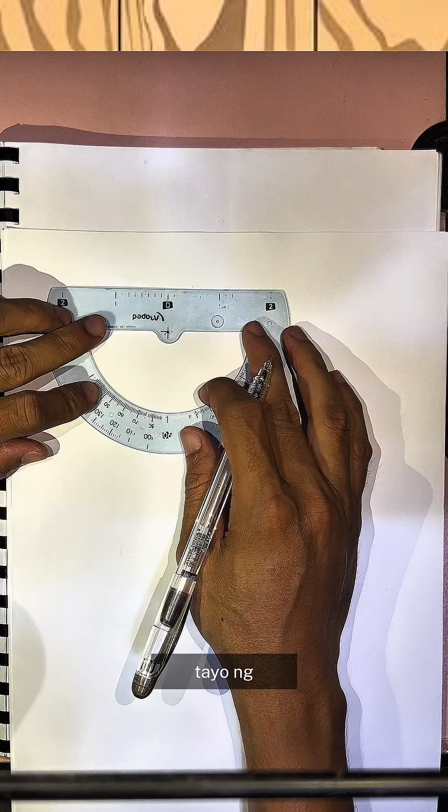So ngayon, magsosolve tayo ng past CE board exam problem sa hydraulics na sinend sa atin ng isa nating follower, isa nating brother, particularly on hydrostatic forces on plane surfaces.

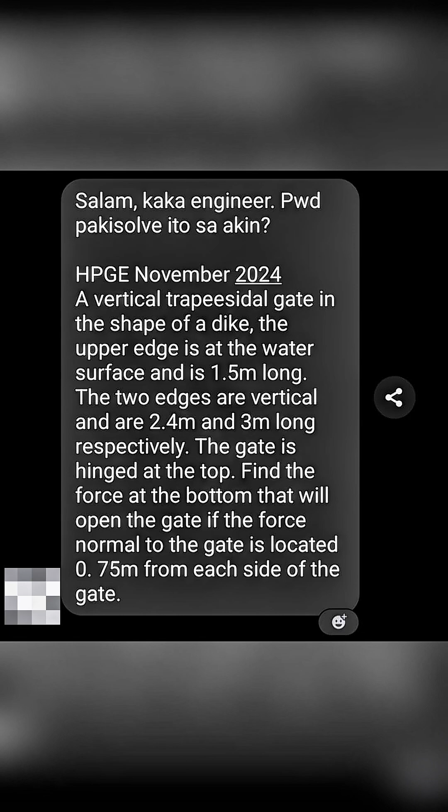So here's the problem. A vertical trapezoidal gate in the shape of a dike. The upper edge is at the water surface and is 1.5 meter long. The two edges are vertical and are 2.4 meter and 3 meter long respectively. The gate is hinged at the top. Find the force at the bottom that will open the gate if the force normal to the gate is located 0.75 meter from each side of the gate.

So ang first thing na gagawin natin is i-draw muna natin ang ating figure. So ang technique lang guys, natin, ang gagawin natin unang-una ay magdo-draw tayo ng figure. Kasi ang figure is very important para ma-visualize natin ang sinasabi ng problem.

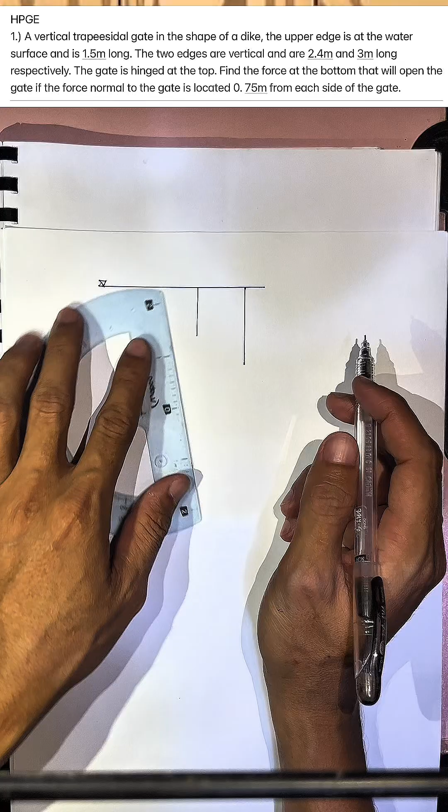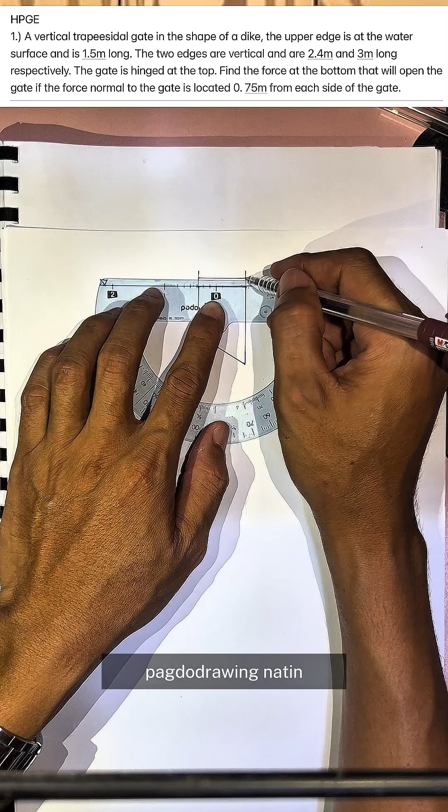So sundin lang natin ang sinabi sa problem. Ang sinabi sa problem, ang surface ng water nandun ang 1.5 meter long na top ng ating gate. So this is measured 1.5 meters. So ilagay lang natin guys. Pagtiyagaan nyo na lang ang pagdodrawing natin. 1.5 meters. Ang next na ilalagay natin ay ang sinabi niyang the two edges, sabi niya two edges

are vertical and are, ang isa ay sinabi niya 3 meters and the other vertical edge is 2.4 meters. So ilagay natin guys, 2.4 meters.

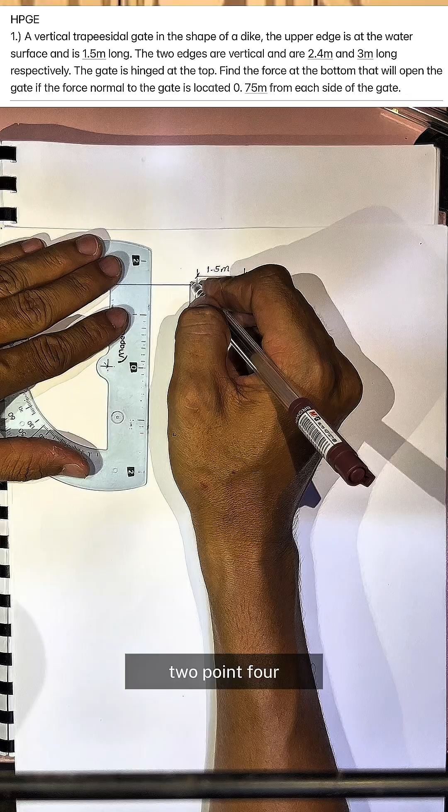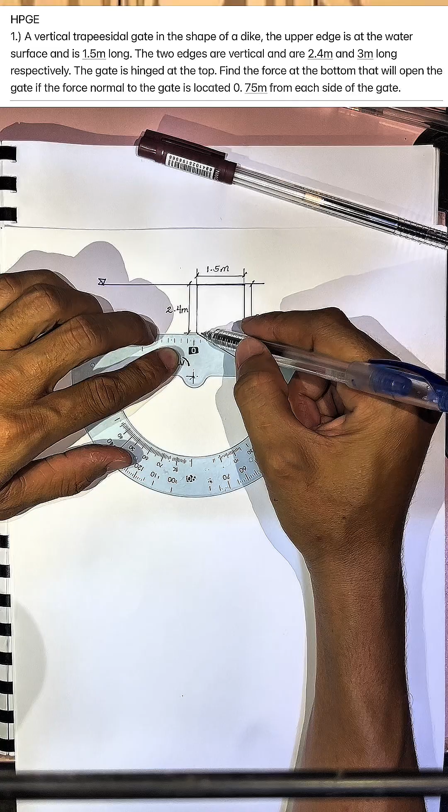And then ang susunod na gagawin natin, ang trapezoidal, i-break natin into two basic geometric figures. Kasi alam naman natin ang trapezoid is a combination of rectangle and triangle. So yan, na-divide na natin guys.

So ang gagawin natin na sunod, i-project natin ang ating gate into its side view. I-draw natin ng side view ang ating gate. So yan, vertical lines lang. Kasi vertical plate lang ang sinabi sa problem.

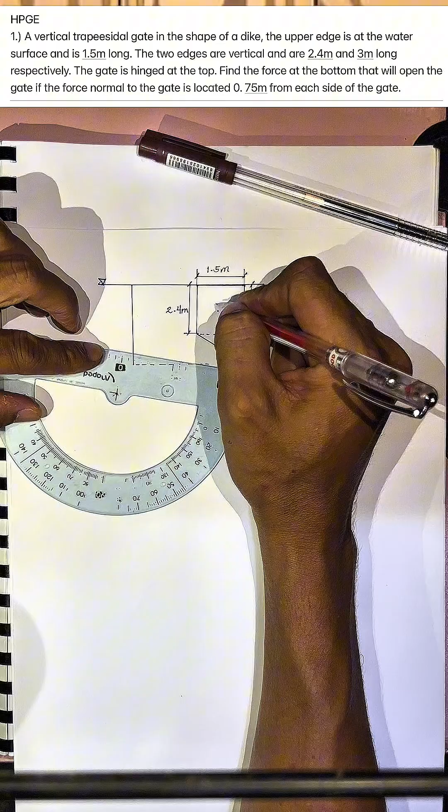So, ibibigay na natin ang locations ng center of gravity ng ating rectangle. Center of gravity. And then, ang hydrostatic force is acting below the center of gravity and acting on a point known as center of pressure. So actually guys, meron tayong dalawang figure, pangalanan natin.

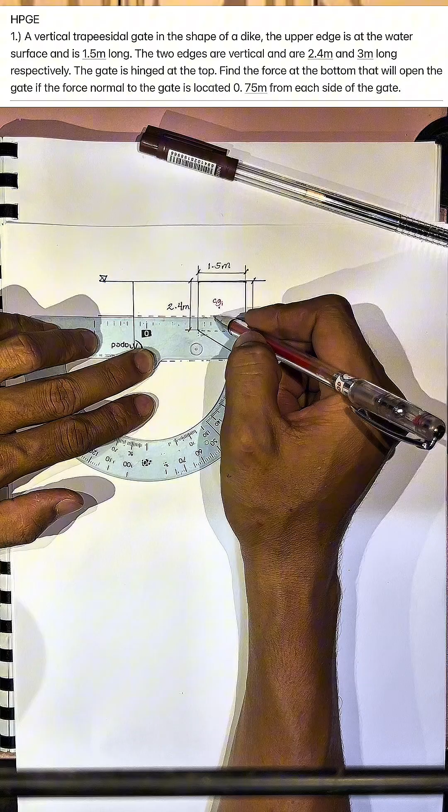So i-draw natin ang projection ng ating hydrostatic force. So ilagay natin ang mga dimensions mamaya.

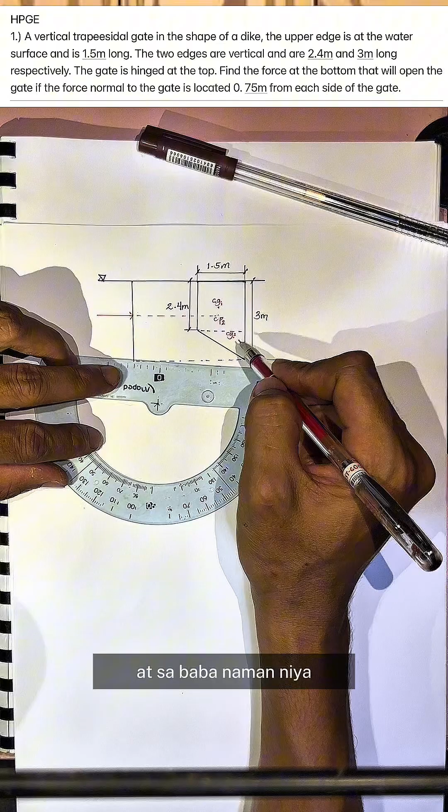Dito naman makikita ang center of gravity ng ating triangle, second figure. At sa baba naman niya makikita ang center of pressure 2. Actually guys, yung nailagay ko sa rectangle is center of pressure 2. Actually, ang correct niyan is center of pressure 1. So doon mag-act ang hydrostatic force 1. Dito naman ang hydrostatic force 2 sa triangle.

And then ipo-project natin para mamaya pag draw natin ng eccentricity, ma-visualize natin kung saan nag-act ang force.

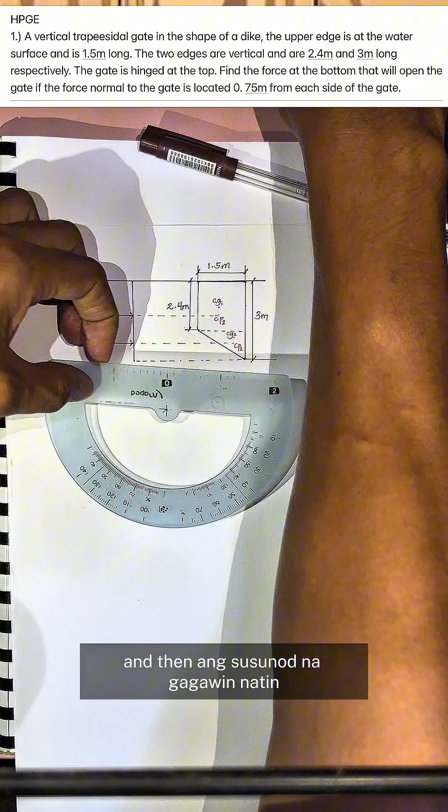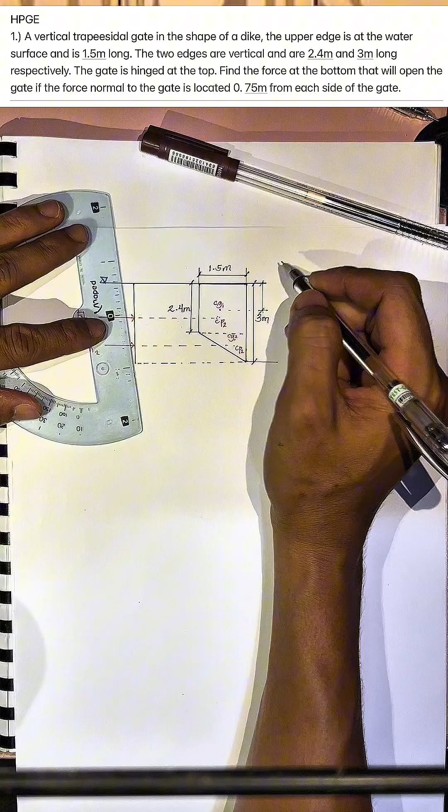And then ang susunod na gagawin natin, ilalagay natin ang centroid ng ating rectangle. Ang centroid ng rectangle is half nung dimension. Half of 2.4 is 1.2 meters.

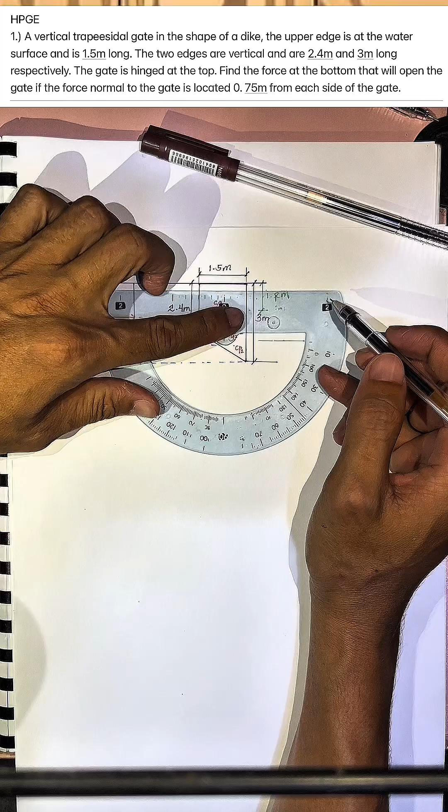So ganun din ang gagawin natin sa second figure, sa triangle natin. Ang triangle natin, ang centroid ng triangle, kung manggagaling ka sa isang side, yun ay 1/3 ang gagamitin. Kung galing ka naman sa vertex, 2/3 ang gagamitin. So since ang panggagalingan ang reference ko ay side, isang nasa side, gagamitin ko is 1/3. So tandaan nyo lang guys, dapat kung master na dapat ang centroids of basic geometric figures.

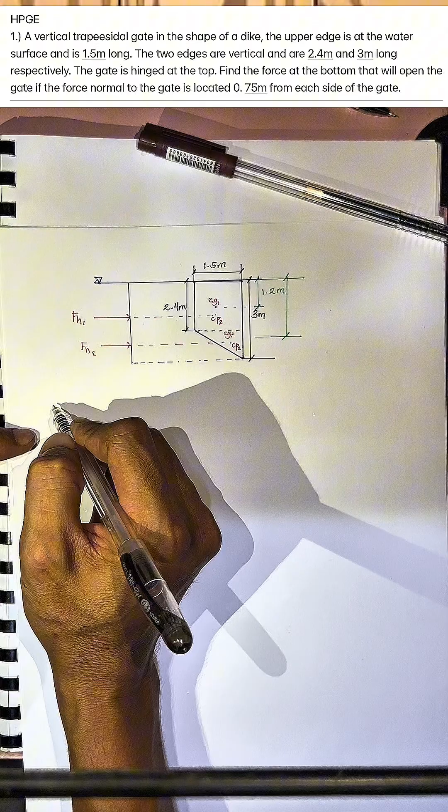So isusulat ko lang guys, ilalagay ko ang centroid is located at 2.4 plus yung centroid ng triangle. So, ilalagay lang natin, isulat natin. Makikita natin ang centroid of the triangle equals to 2.4 plus 1/3.

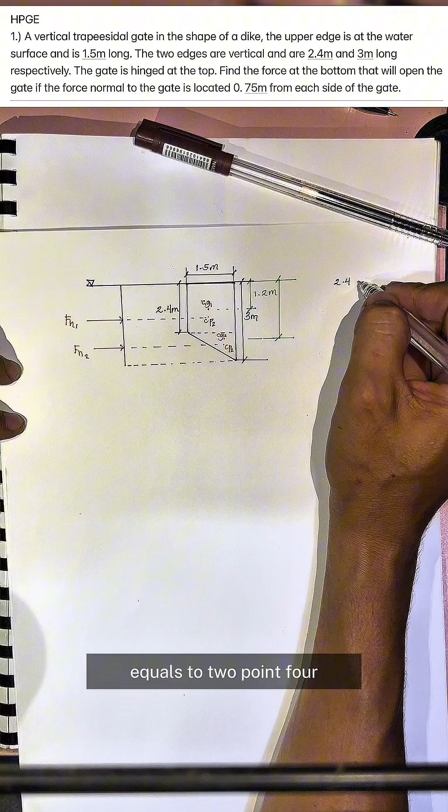1/3 nung side na yon, ima-minus natin guys. Kasi alam naman natin na ang isang side length ng rectangle is 2.4. So isubtract natin ang 2.4 na yan mula doon sa 3 meters. So ang matitira is 0.6. Ima-minus natin 0.6 meter. So ang 0.6 meter na yan na yung dimension ng triangle, isang dimension.

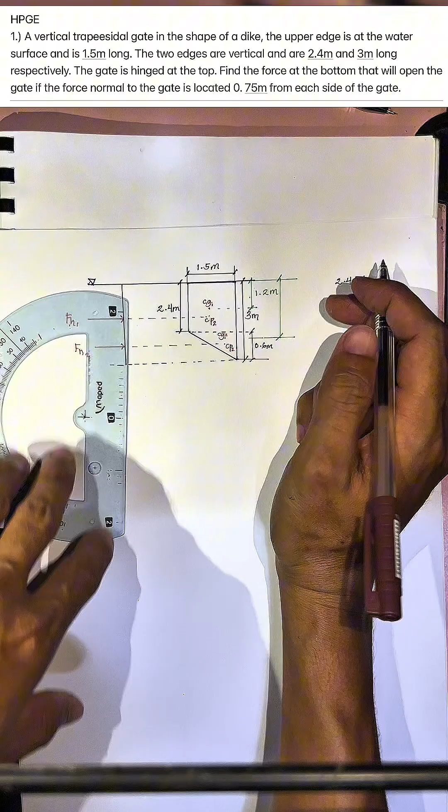Therefore 1/3 ng 0.6, that is equal to, i-calculate natin guys para sure.

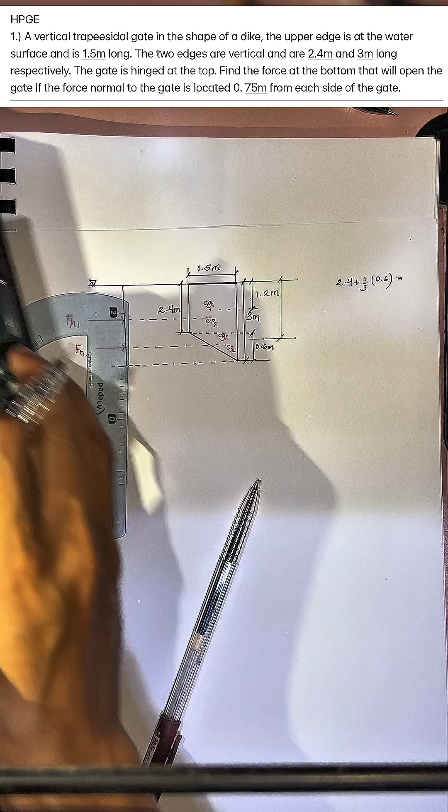Equal to 2.6 meters. So that's what we'll put here as the measurement from the surface of the water to the centroid of the triangle, 2.6 meters.

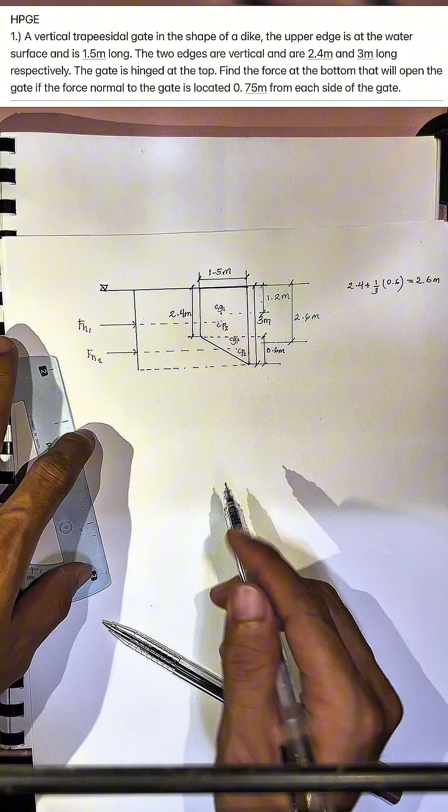And then guys, we can now solve our hydrostatic forces. Let's do them one by one, starting with hydrostatic force 1, equal to the pressure at the center of gravity of the rectangle times the area of the rectangle.

From pressure, we know that pressure equals the unit weight of the liquid times the height or depth, times area. So equals 9.81 since water is the liquid, times the barred h, which is the centroid of the rectangle equal to 1.2 meters, times the area of the rectangle which is 1.5 times 2.4. So let's input 1.5 times 2.4.

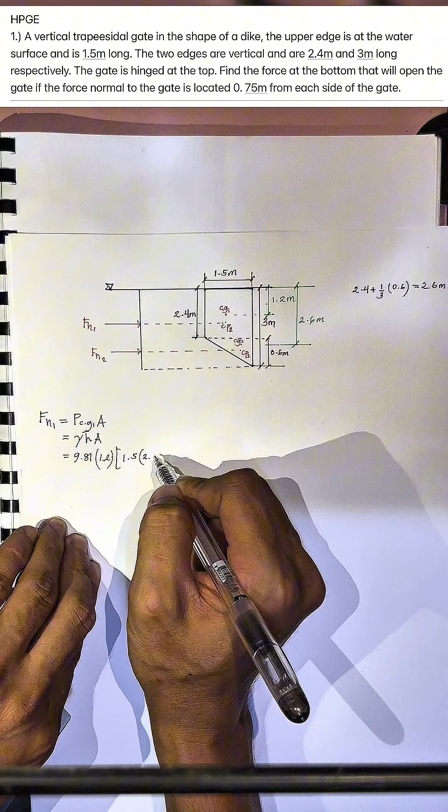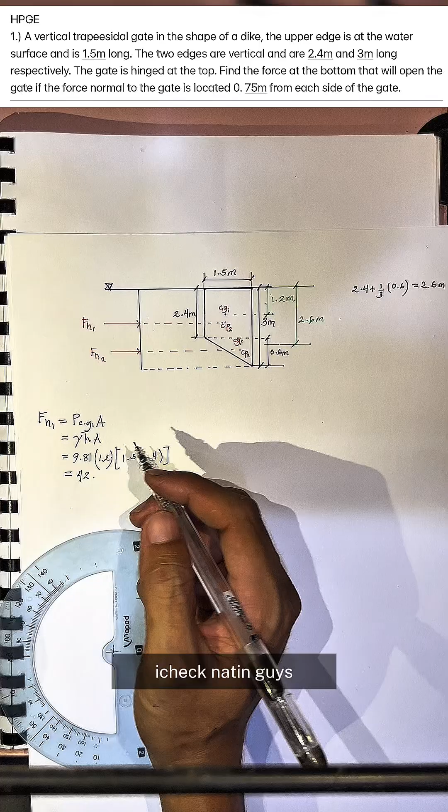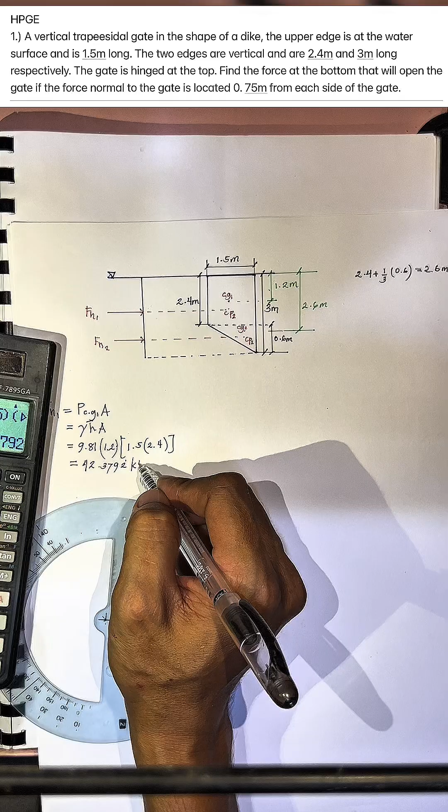Let's calculate this. This is around 42. Let me check, let's double check: 9.81 times 1.2 times area 1.5 times 2.4 equals 42.379.

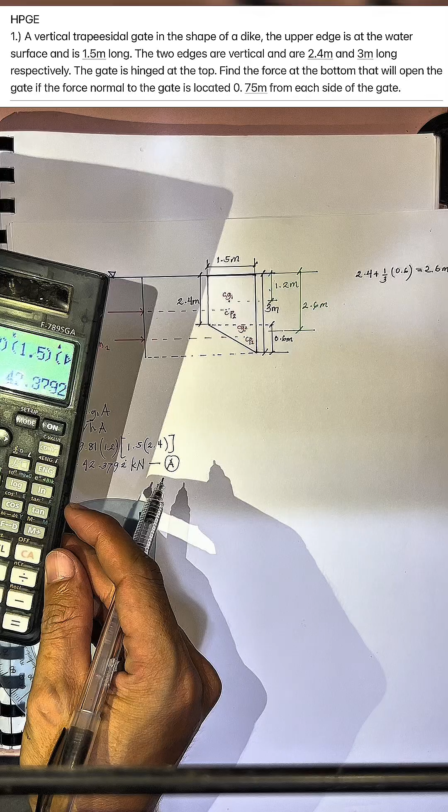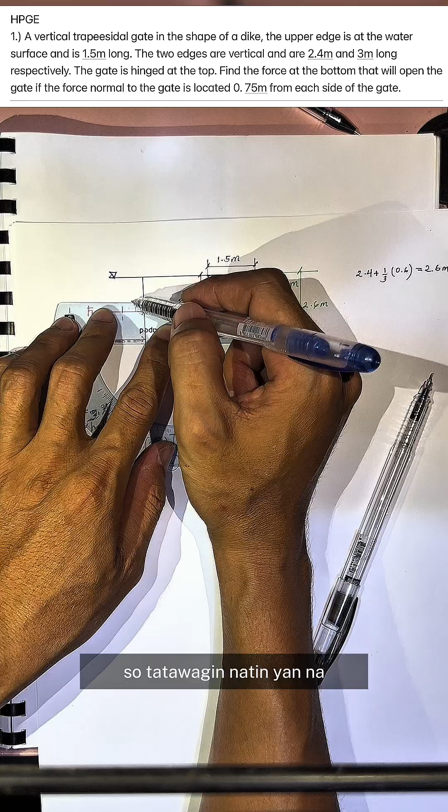And then next, we'll find the eccentricity, because this force won't act at the center of gravity. It acts below the center of gravity, below where our force will act. So we'll call this E sub 1, or eccentricity 1.

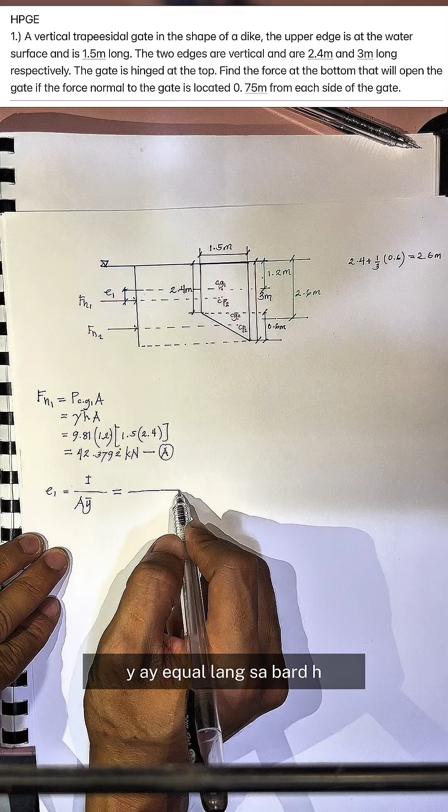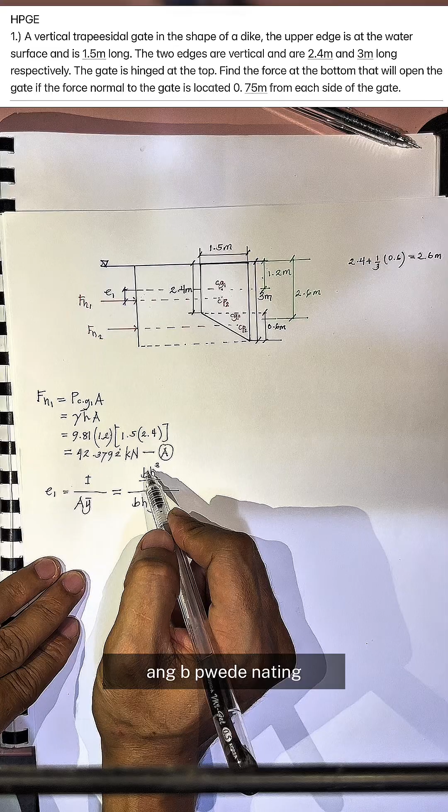So the eccentricity formula is equal to the moment of inertia divided by the product of area and the barred y. If our gate is vertical, the barred y is equal to the barred h. Moment of inertia of the rectangle is b h cubed over 12, area is b times h, times barred y. Notice we can cancel the b, and cancel one h, leaving 2 in the power. So this becomes h squared, since 2 remains in the power, divided by 12 times barred y.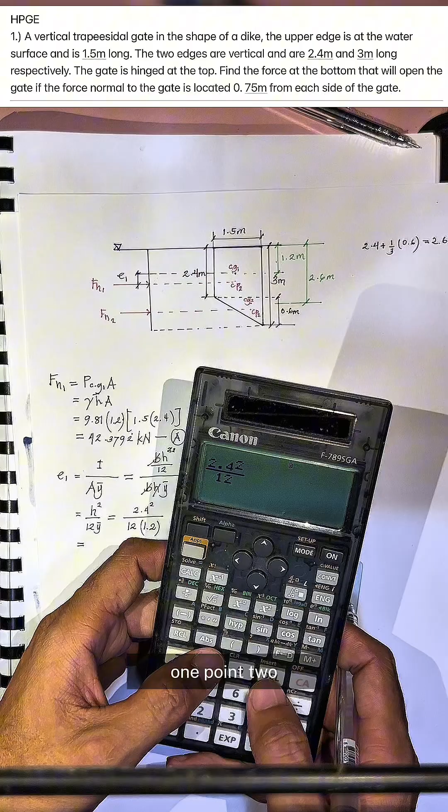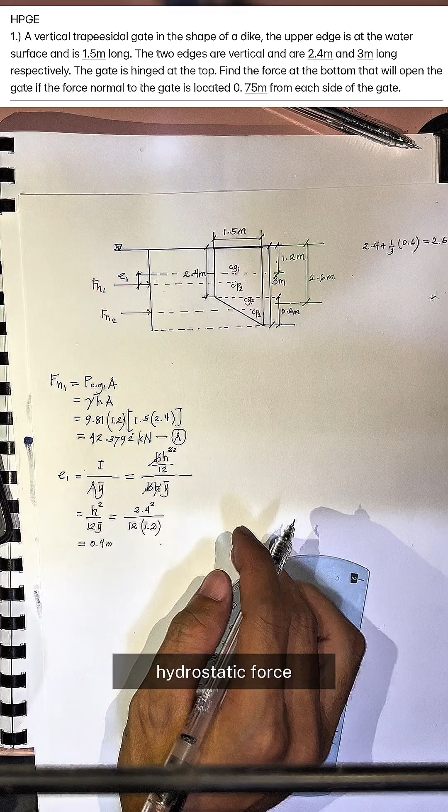So let's put in the values. Our h for the rectangle is 2.4, squared, divided by 12 times barred y, which is equal to the barred h since our gate is vertical, equals 1.2. Let's calculate: 2.4 squared divided by 12 times 1.2 equals about 0.4 meter. So 0.4 meter is the eccentricity of our hydrostatic force on the rectangular part of our gate.

So second, let's solve the hydrostatic force of the triangular portion. Same formula applies: pressure at the center of gravity times area. Pressure equals the unit weight of the water times barred h, same formula, times area.

Let's put in the values: 9.81 since water is our liquid, times the barred h of the triangular part, found by adding 2.4 and one-third of 0.6, which is about 2.6, times the area, one-half of base. The base of the triangle equals 1.5, times the height of my triangle which is 0.6 meters.

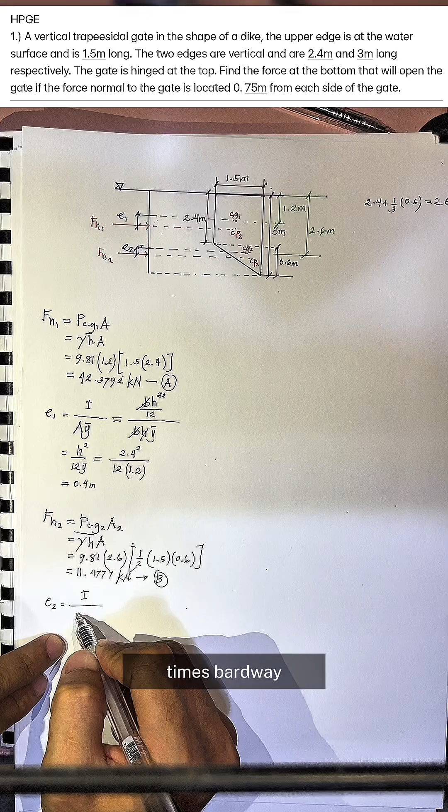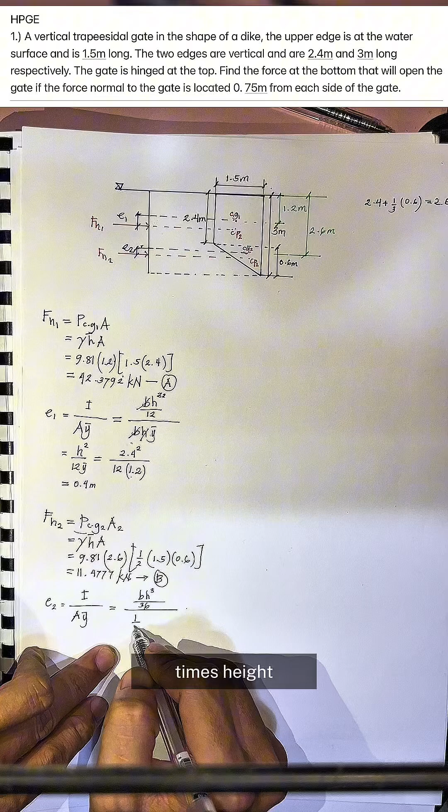So for E sub 2, eccentricity 2, same equation: I over A times barred y. The moment of inertia for a triangle is base times height cubed over 36, over area which is one-half of base times height, times barred y. Notice the base can be cancelled, and one h can be cancelled too, leaving 2 in the power. That becomes h squared over... we can also cancel the 2 there, leaving 18.

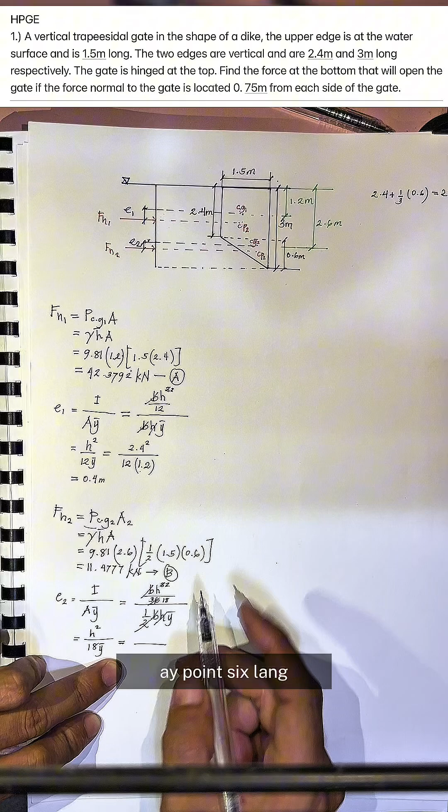18 times barred y, so let's substitute the values. The h is 0.6 since the height of our triangle is just 0.6, squared, over 18 times barred h. The barred h equals 2.6 which we got earlier.

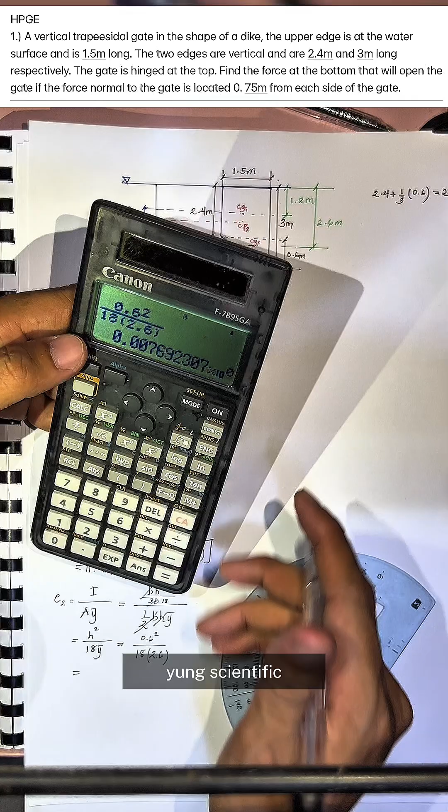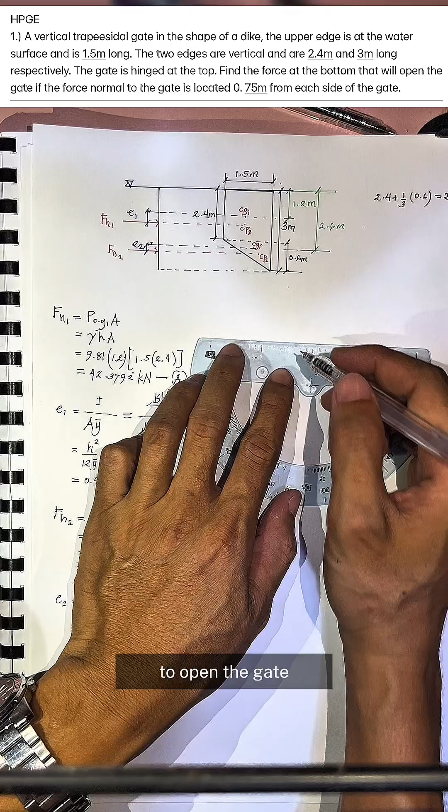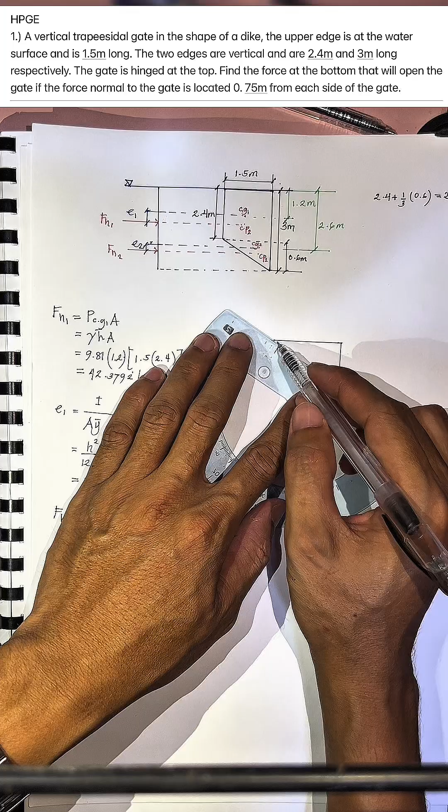Sinabi sa problem na ang force na required to open the gate ay acting 0.75 meter measured from each side of the gate. So ilalagay lang natin muna ang dimension. This is equal to 0.6 kasi yun na triangle, 0.6 meter.

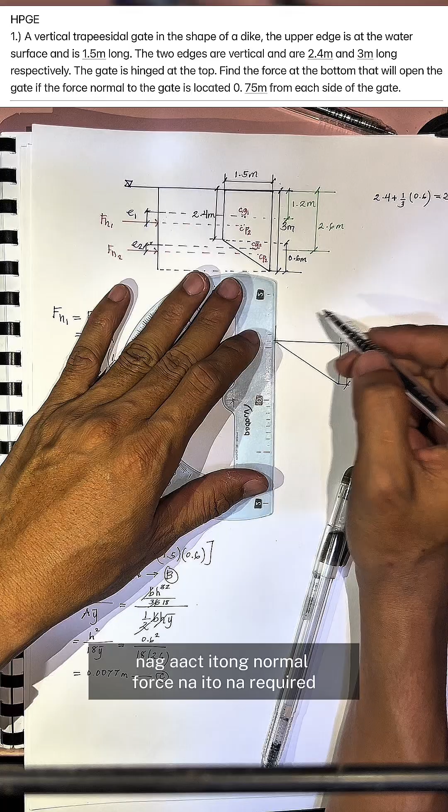So ilagay natin kung saan nag-a-act itong normal force na ito na required. Nakita nyo kanina sa problem, located 0.75 meter from each side of the gate. So ilagay natin 0.75 meter, 0.75 meter.

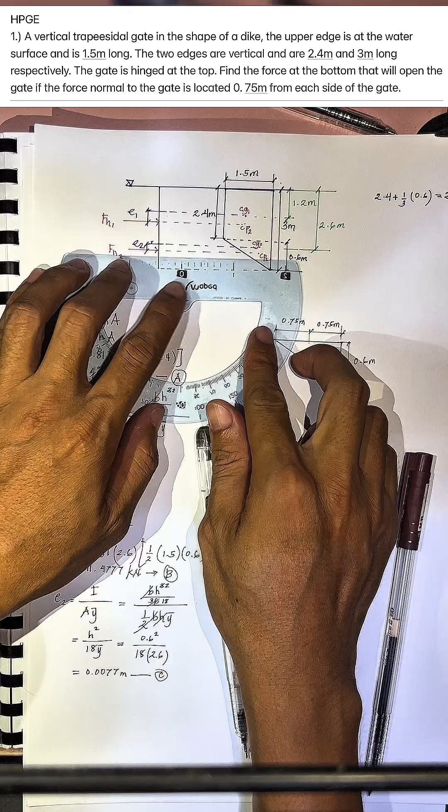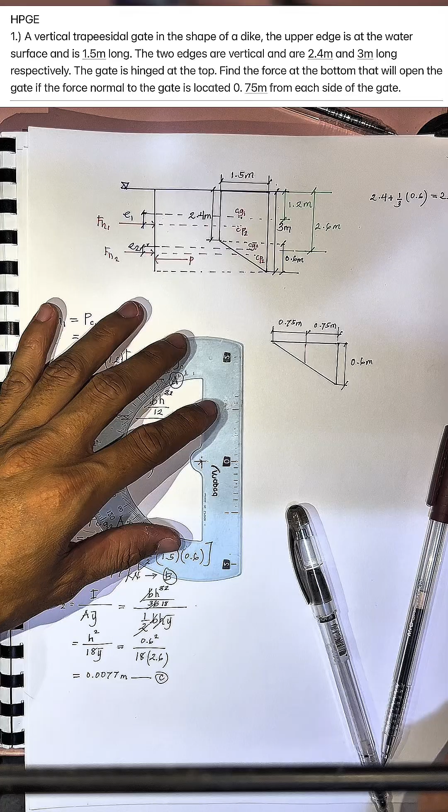Kailangan pa natin i-draw para makita natin kung saan nag-act yung force P. Tawagin natin force P. At yung vertical location niya, tawagin natin yan na Y.

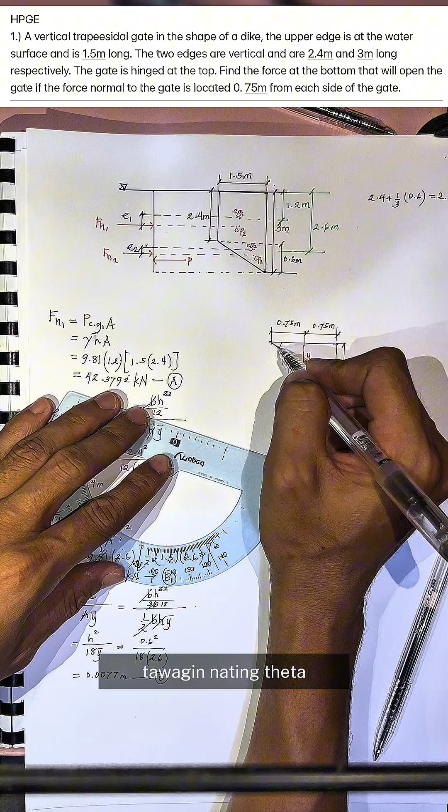Makikita ninyo, pwede tayong magbuo ng another triangle inside the big triangle. Notice nyo, yung inclined plane na yan, the same yung angle na na-form niya from the horizontal, theta. Tawagin natin theta, the same with the theta na nasa maliit na triangle.

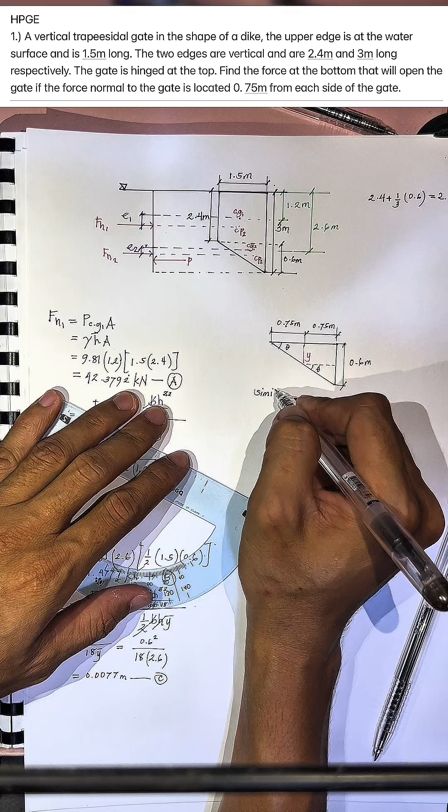So we can use the similar triangle. Similar triangles yan dapat, kung meron tayong similar triangles pwede tayong gumamit ng ratio and proportion. Kasi yung incline na line, yung hypotenuse ng malaking triangle, the same lang yung hypotenuse nung maliit na triangle, from the same line lang. So we can use ratio and proportion.

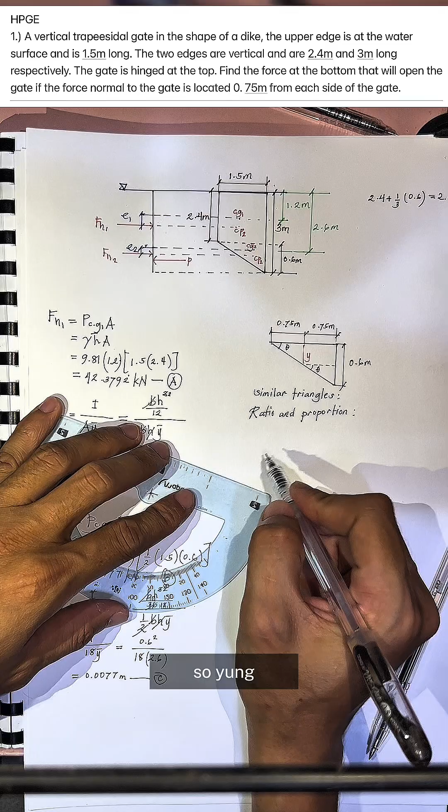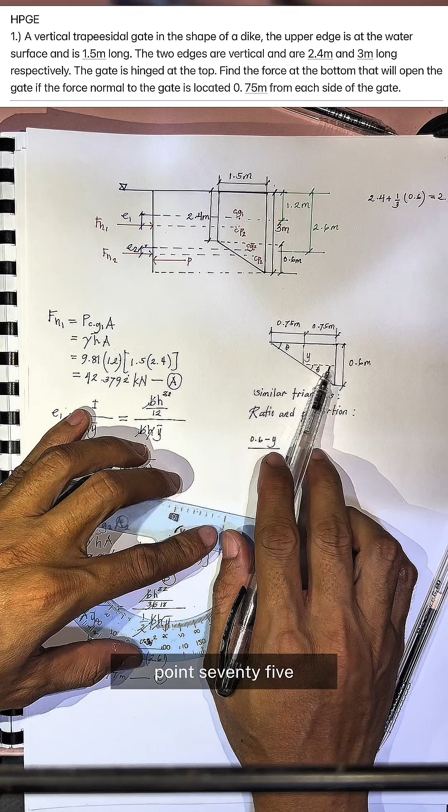So yung side na yun is 0.6 minus y. Yung 0.6 na yun, yung buo, babawasan natin ng y. So yun na, ito na yung side na ito, yung 0.6 minus y over yung 0.75. Makikita natin yung side na yan, 0.75 equal to yung malaking triangle naman. Yung malaking triangle, meron siyang 0.6 divided by yung 0.75 plus 0.75 equal lang yan sa 1.5.

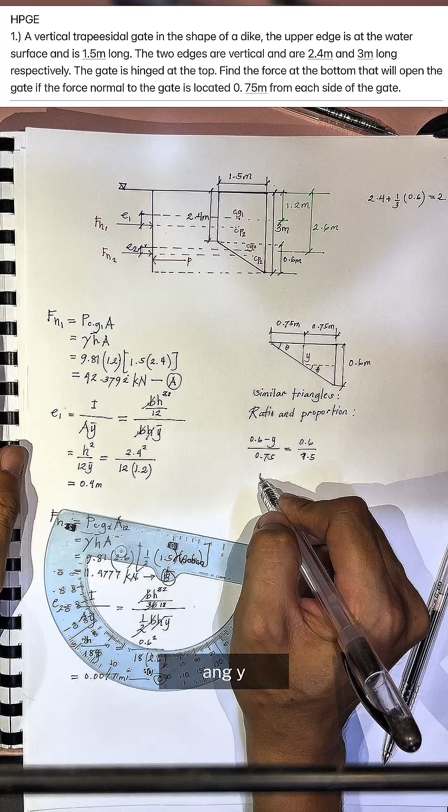So pwede na natin ma-solve ang y. Pwede natin i-shift solve o pwede rin naman i-cross multiply then i-transpose lang yung y. Sa calculator gumagamit tayo ng variable x kasi yan yung ma-recognize ng ating calculator. Shift, solve. Ang makukuha natin is 0.3 meter.

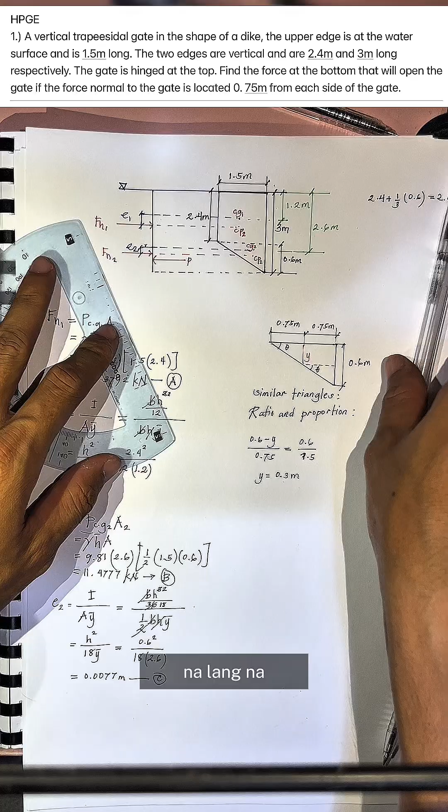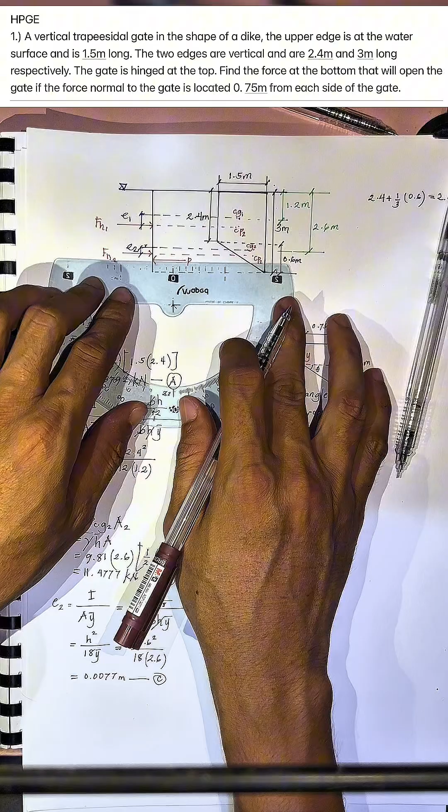Yan na yung gagamitin natin pag magmo-moment tayo. So ilagay lang natin yung dimension na yan para pag mag-moment na tayo, automatically makikita natin yung gagamitin natin na lever arm or moment arm, parehas lang ang ibig sabihin.

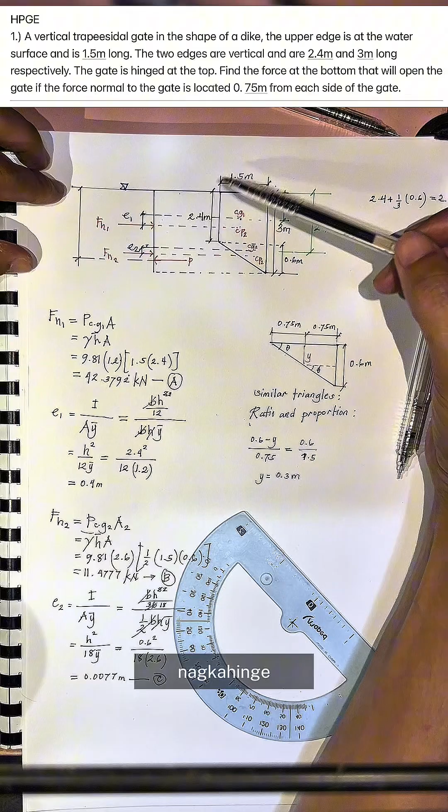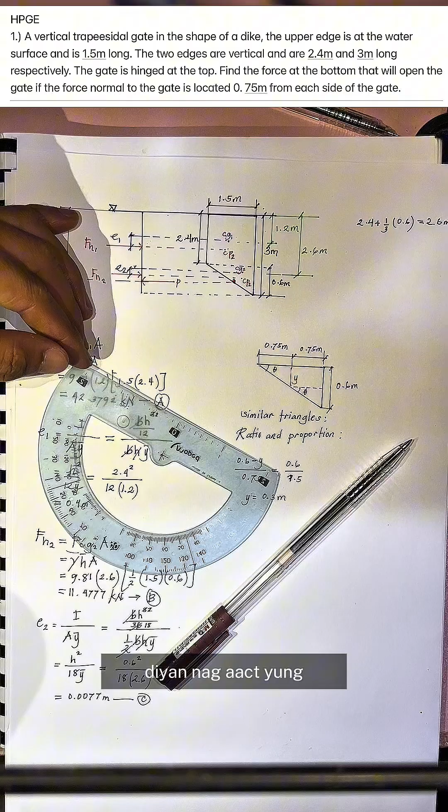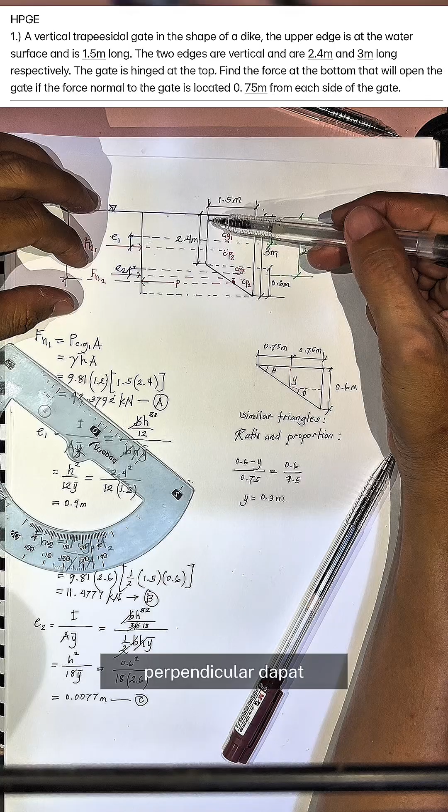Ilalagay natin. Sinabi pala sa problem na ang gate na yan ay naka-hinge. So makikita natin ang force P is acting below dapat doon sa location ng hydrostatic force 2 o hydrostatic force na nasa triangle. Makikita natin yung point na yan, diyan nag-a-act yung normal force P, normal to the gate. Ibig sabihin kung normal, perpendicular dapat.

So i-calculate natin, i-add natin. Magiging 2.7, naging 2.7 kasi i-add pa natin yung 0.3 na yun.

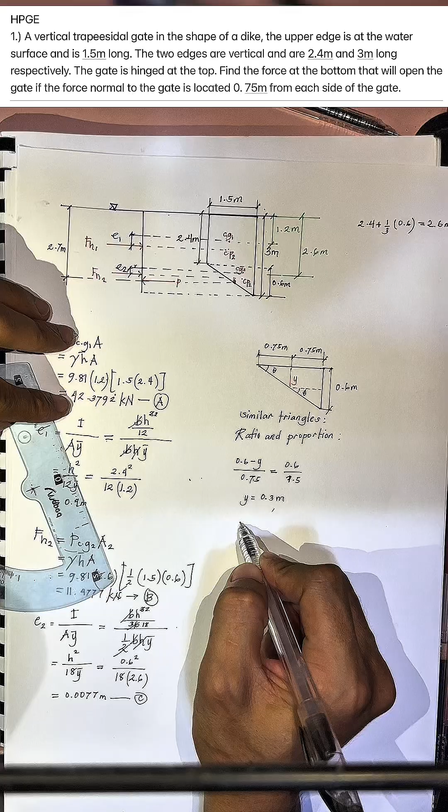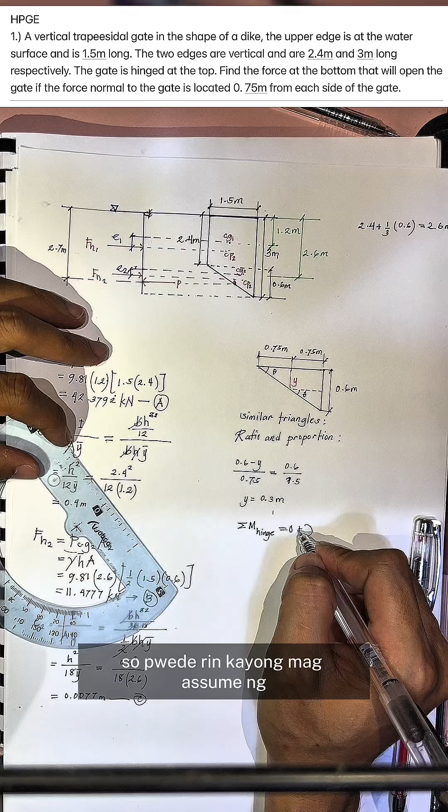So ilagay natin yung plate is naka-hinge sa top. Kung naka-hinge yan sa top, wala dapat yung moment resistance. Ibig sabihin pwede tayong mag-moment dyan na mag-i-equal tayo ng 0. Summation of moment about the hinge equals to 0, assuming positive clockwise. Pwede rin kayong mag-assume ng positive ang counterclockwise. Ang P is acting o mag-rotate siya clockwise, so positive siya.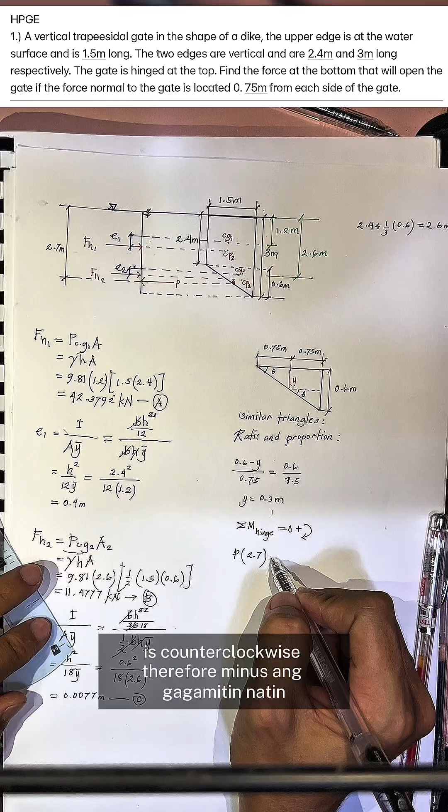P times ang lever arm is 2.7 measured from the hinge kasi doon tayo nag-moment. And then ang hydrostatic force 1 is counterclockwise, therefore minus ang gagamitin natin. So equal to 42.379. Ayan lang ang gagamitin natin kasi i-recall lang natin sa calculator.

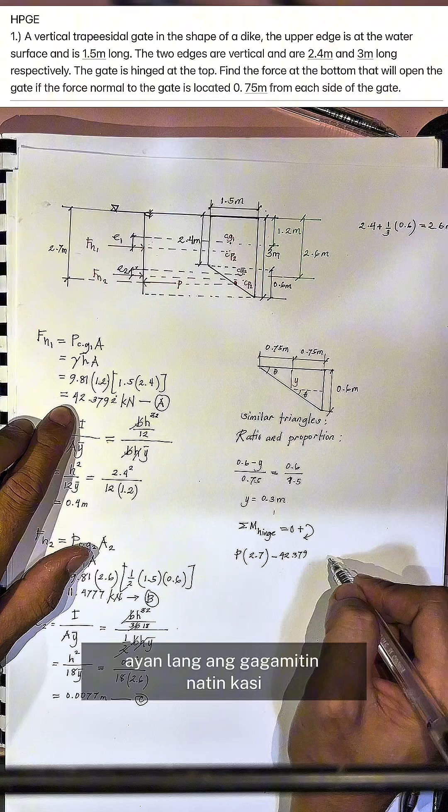Sakto naman ang value. Ang lever arm is about the centroid plus yung eccentricity niya. Eccentricity niya is 0.4 meter.

So ang hydrostatic force 2 is counterclockwise na naman, therefore minus ang gagamitin natin. Equal to 11.47. Pwede ko nang gamitan ng 8 kasi i-recall lang naman natin yan mamaya.

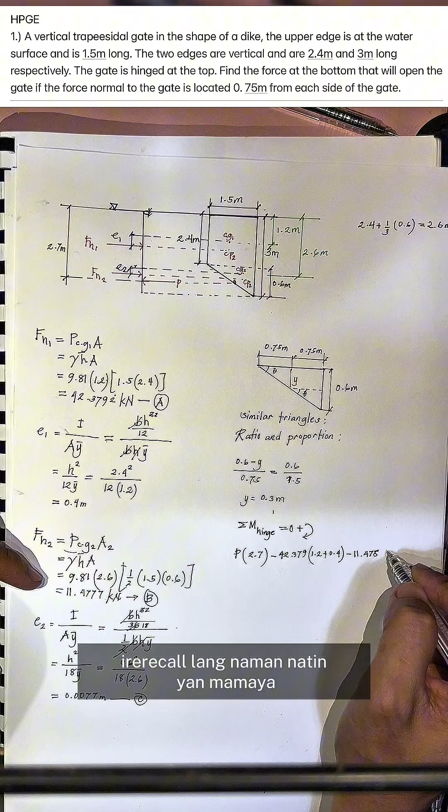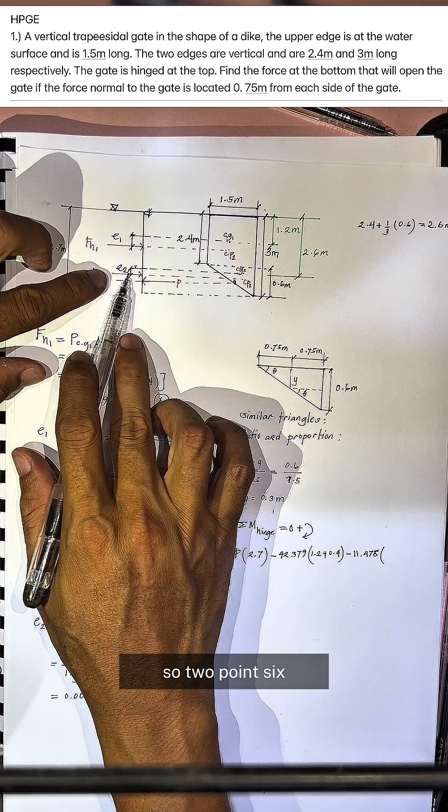Ang lever arm is yung centroid na yon plus itong eccentricity 2. So 2.6, yan ilagay natin, 2.6 plus yung eccentricity 0.0077 equals to 0 kasi hinge naman yan, walang moment.

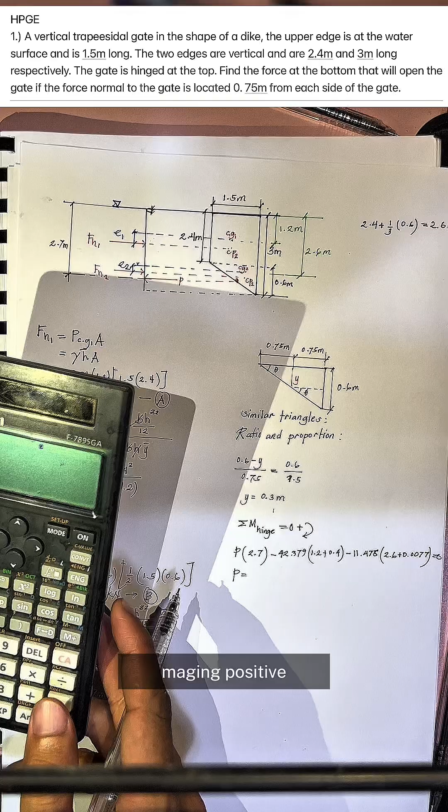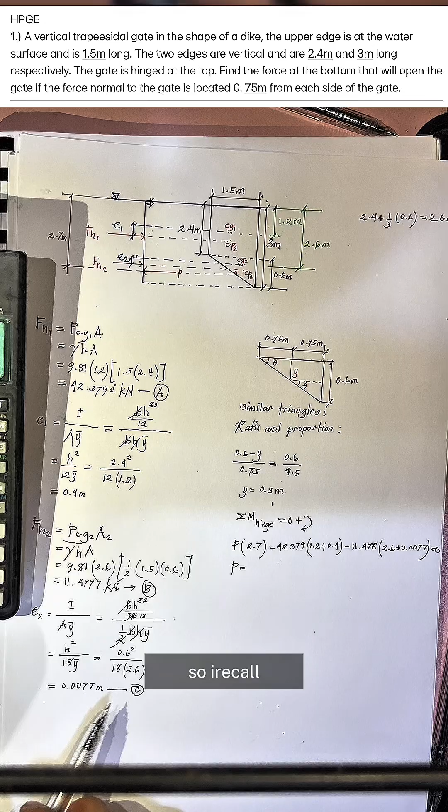So makukuha natin ng P, maita-transpose na natin yan, i-transpose maging positive 42.379. I-recall A ko kasi naka-save sa button A, times 1.2 plus 0.4 plus, kasi transpose ko na yan, yung 11.478 na store ko sa button B, call B, times ang lever arm 2.6 plus yung 0.0077 na store ko sa button C, so i-recall C ko lang, divided by 2.7.

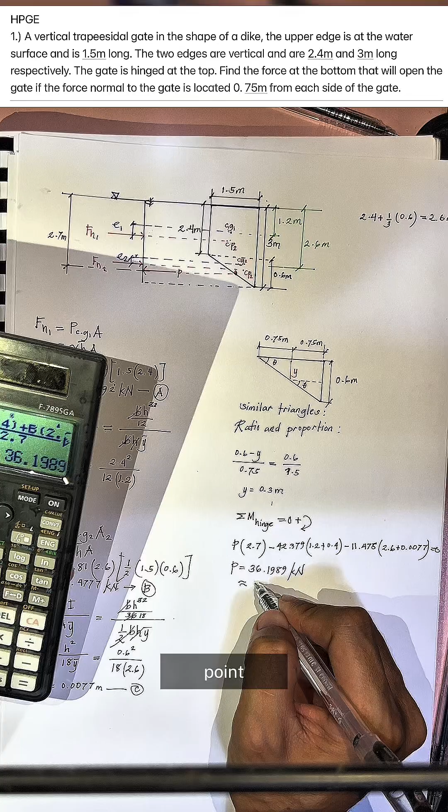So meron tayong makukuhang 36.1989 kilonewton, o pwede rin yan approximately 36.2 kilonewton.

Itong value na yan ang yung required force para ma-open ang gate. Ang force na yan ay mag-a-act sa bottom ng ating gate. So yan na yung final answer natin.